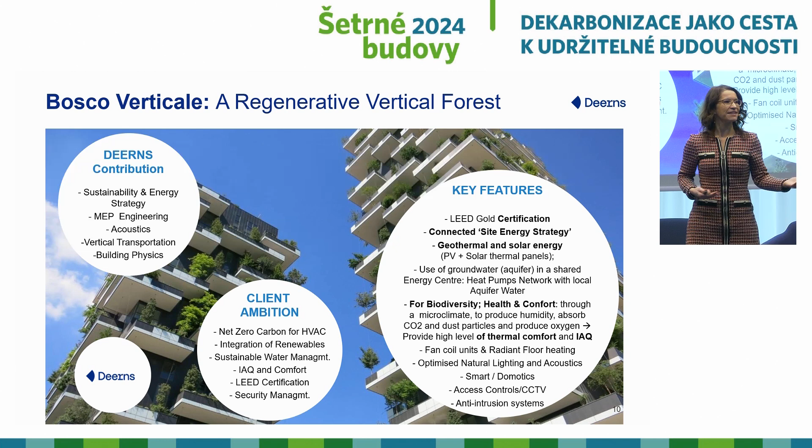Deerns was in charge of the sustainability and energy strategy, MEP engineering, mechanical, electrical, plumbing, acoustics, vertical transportation, and the building physics of the building. One of the key features was LEED certification, but today I'll focus on the energy strategy, relying on geothermal and solar, and how this benefited biodiversity and the trees that you see in the facade.

I won't drown you with a lot of technical information, but just to give an idea, the buildings don't work alone. They are connected within the urban district to other buildings, another office building, a mid-rise office building, and two other low-rise residential buildings. So this is the two towers, Bosco Verticale.

When starting to develop these, we didn't do a system per building. There was already a connected approach, thinking at an urban scale, even for one building. So it was decided to think of synergies, to have different buildings with different uses connect to each other and have a centralized energy center that could benefit from the resources of some and reuse them. Resource reuse, already by then, with heat.

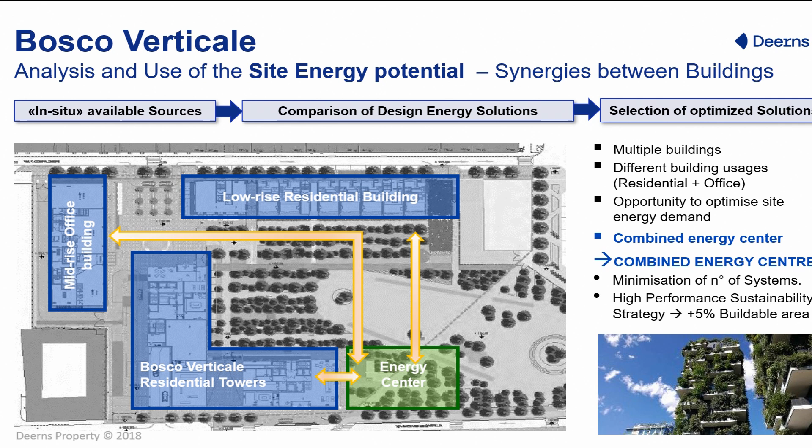So there is this combined energy center that allowed minimizing the number of systems, less carbon, less cost. But also, by optimizing the sustainability piece, you create value, because when you had in Italy, in Milan, a certain level of sustainability, you could have an extra allowance of 5% more buildable area. So you create a business case there too.

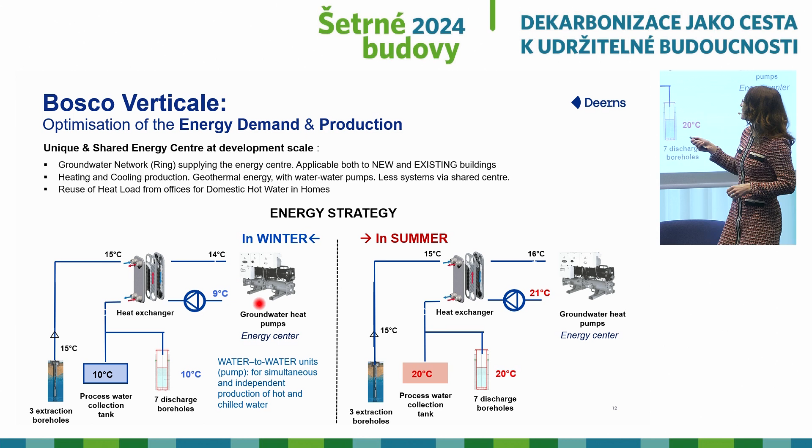Without diving into the details, this makes use of a groundwater system, an aquifer, that supplies the energy center. You get water at 15 degrees, where the temperature is more stable than the air outside. You use it to cool down or heat the building, because the water is hotter than the air outside. Then it goes back through the heat exchange to a processed water collection tank, which collects it and sends it to the discharge boreholes.

That's in winter, so you can heat the building with this geothermal system. In summer, as the water is colder than the air outside, you cool the building, bring it to the collection tank, it cools down, and then it goes to the discharge holes.

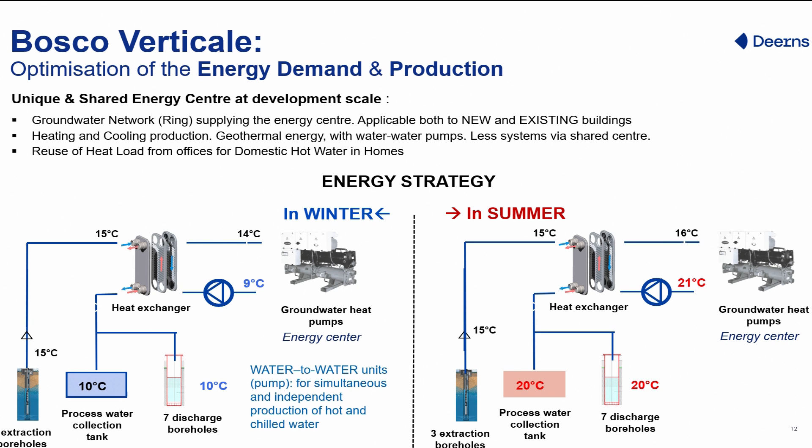The geothermal approach didn't serve only for the energy piece, reducing demand and the energy needed from outside, but also by creating a connection between buildings, a synergy system. The heat from the offices could be reused to heat the water and heat the space, domestic water, and heat the space in Bosco Verticale and the other residential buildings.

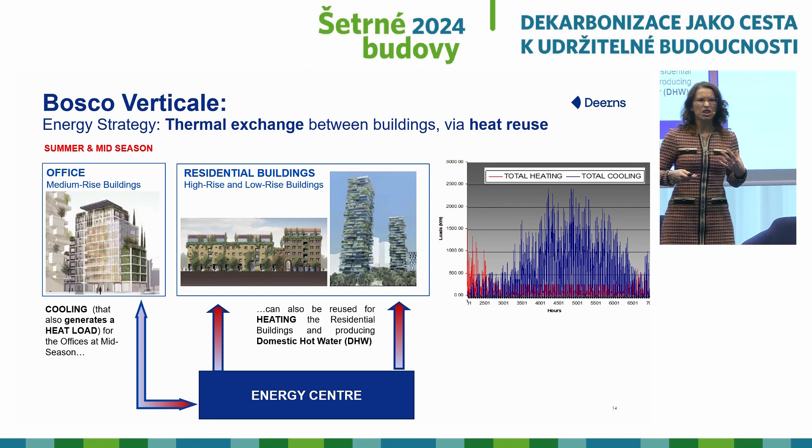This is during winter. The other way around, during summer, when you cool down, the equipment you use to generate the cooling also gets hot. So you recover that heat and send it back also to the residential buildings, from the office to the residential buildings, to keep heating the hot water and for other uses, also reducing the energy needed to do it from scratch. So this is just an example that by 2007, we were already integrating the reasoning of resource use and minimizing demand, thinking of the opportunities on the site.

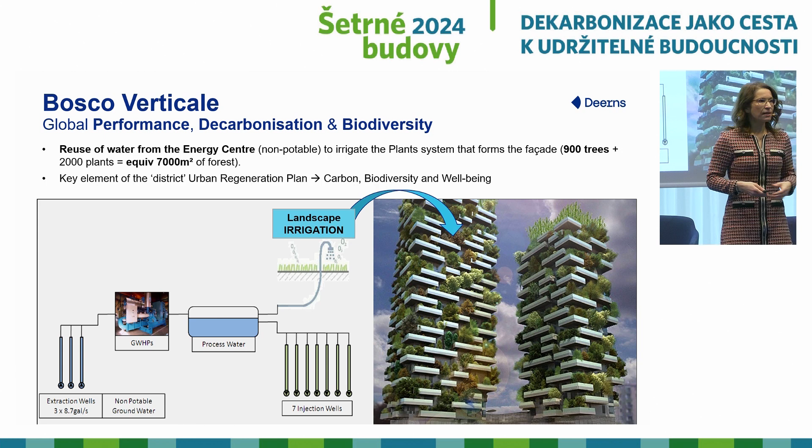It's a building with 900 trees and 2,000 plants that you need to irrigate. So there was also a strategy of water management, because the processed water tanks, non-potable water, were thought to serve the energy center but also to create the water used for irrigation of the building. So actually, it's quite a sustainable approach to use water to keep the trees and the green alive without making use of potable water that can be used for other opportunities.

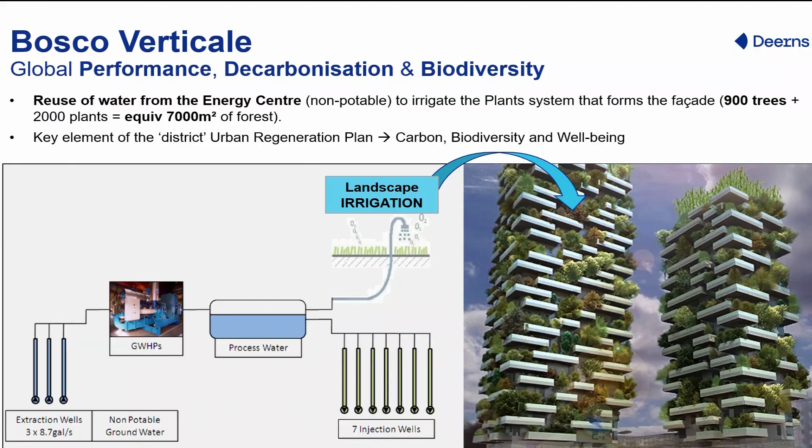So the landscape irrigation was there as a strategy, also connected to the whole energy system, and we had to think of this as a whole system, not just for one topic or one thing, but sustainability as a whole. And here we have Bosco Verticale, thought of at a very early stage, because if you think of this too late, if you think with traditional processes where you design and then put all the systems at the end with the remaining space or budget, it doesn't allow you for much, or at least to become an icon.

So actually this had to be thought since the beginning to explore the potential of the energy sources available on site. And keep this in mind because we'll come back there at the end. The potential available on site and not just imagining that the energy will arrive.

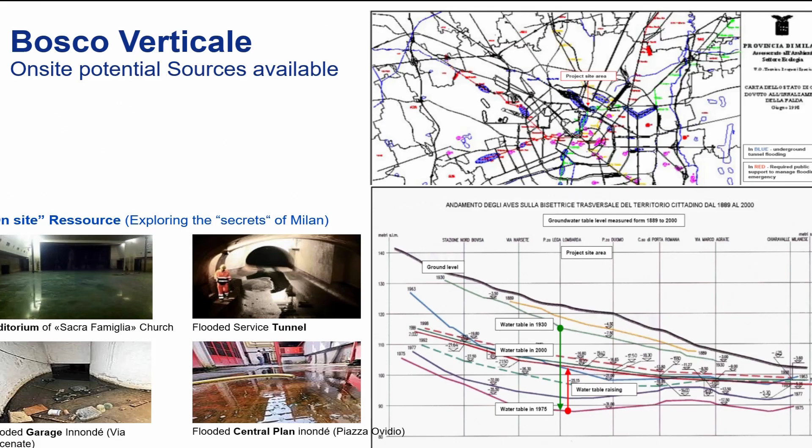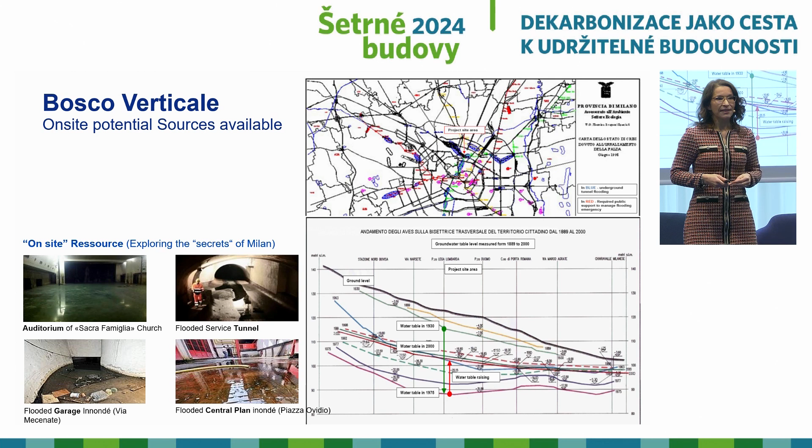So the team had analyzed spaces like an auditorium of an old church, a flooded service tunnel nearby, a flooded garage also there, a flooded central plant, and what could be used to store that central energy center that could serve multiple buildings and make the exchange. So analyses were done very early in the process, in the stage.

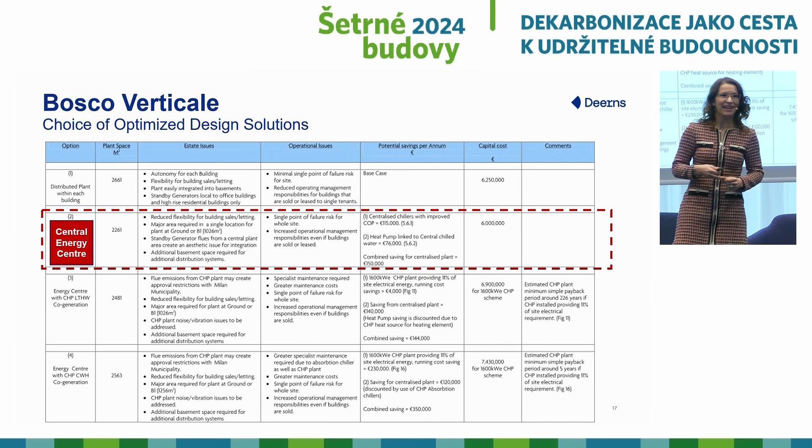The implications of such possible solutions were analyzed in terms of cost, in terms of technical consequences, in order to be able to make an optimized design solution and caring for the performance outcome, but also of the cost and the value generated at the end. So I won't dive in the very small Excel sheet that you see there, but just to give you an example of what's behind all the trees in the facade and the strategy that was thought very early in the process.

Another building from Deerns, The Edge, headquarters of Deloitte in Amsterdam. And here we shift. So the sustainability concept, green certified, evolved also with The Edge to integrate considerations of user experience, smart building, and NZEB, nearly zero energy building. What does The Edge have that's so special?

Well, The Edge hosts Deloitte. It's a 40,000 square meter building, where the request was, we want this to be the most sustainable building worldwide. The request is not to be smart, actually. The request is to be the most sustainable building there. We want to be an icon of sustainability. And actually, during the process of doing it very sustainable and thinking how to make it smartly operational, it became also a smart building icon. Deerns was in charge of sustainability and energy strategy, as well as the MEP and all the systems design.

The Edge produces more energy than it uses. And actually, one innovative point was the use functionality, the intensity of use, because it was required to make a 40,000 square meter building able to host the equivalent of people that would go in 100,000 square meters, because they want to centralize all the people there and intensify the use. So the smart building strategy came also to intensify the use, and they allow for functionalities that would make the office quite tailored to the number of users and type of use they would like to have.

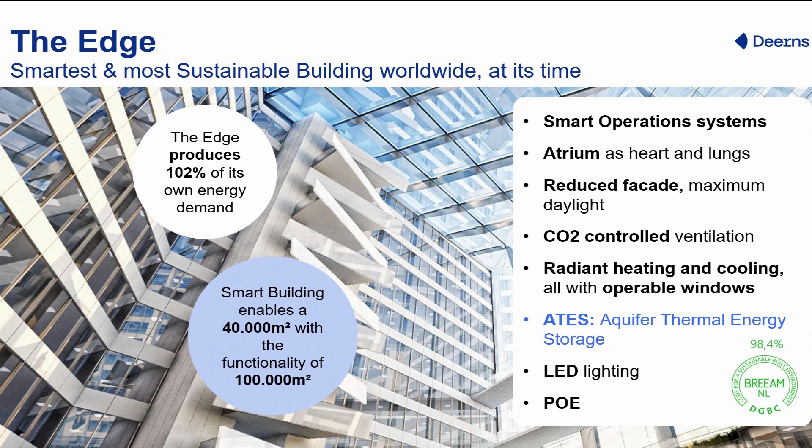So there are different strategies in terms of sustainability, the atrium that works like a lung, that also raises issues. It works very well in the Netherlands, but in other countries it will raise issues of fire security or not, so also the teams have to work on that.

Reduced facade, maximum daylight, controlled CO2, indoor air quality considerations, and one of the elements that differentiates it, the ATES, aquifer thermal energy storage, a solution we use a lot within Deerns for hospitals, data centers, labs, and here for offices, and that we've applied in dozens of buildings. But once again, an innovation in one country or in a segment may actually not be an innovation in another market, and the other way around. What's ATES?

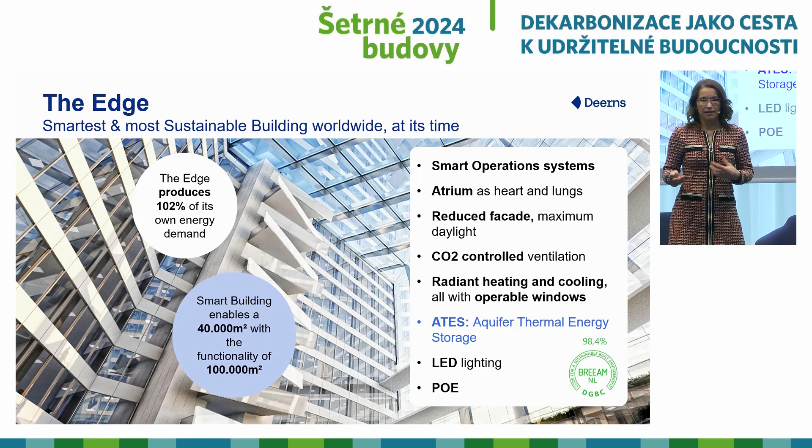Aquifer thermal energy storage. It's also a form of geothermal energy, not the one you see with the water that floods on the ground. Actually, you create the battery in the ground. You'll have a pool where you'll always put the heat in there, and you have another one where you'll always put or get the cold from there. And it doesn't circulate. So you create the battery that becomes operational and actually serves to feed the building with heat and with cold.

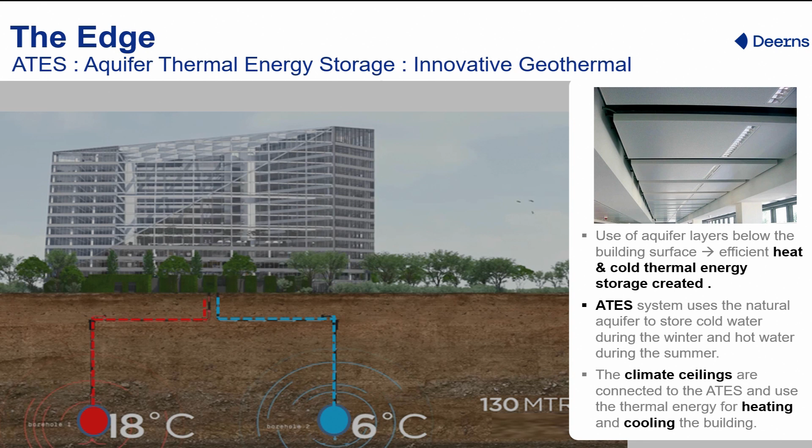Then it's connected to climate ceilings, but here it was just to know that, once again, we use the potential of the site, of the soil, to think how we could minimize, of course, through the building design, the demand, but actually use alternative energy resources with what we have on site.

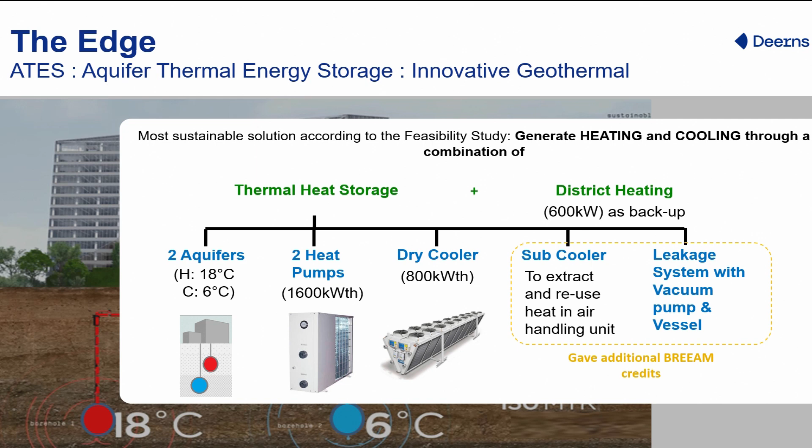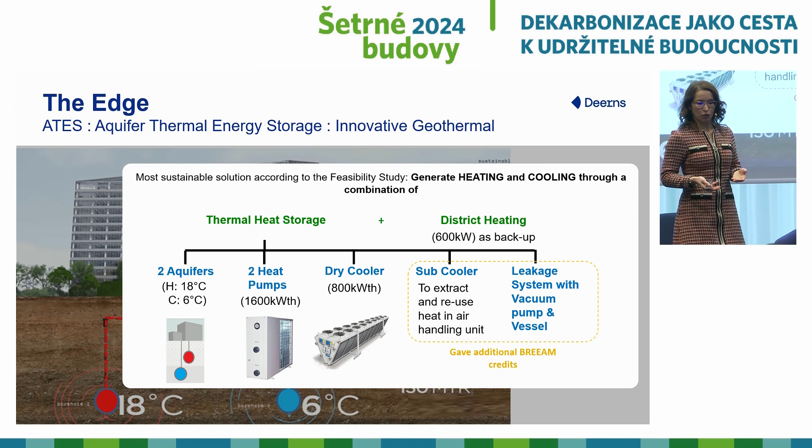It's important to think very early in the stage because The Edge was the building that reached the highest score on BREEAM, BREEAM Outstanding. The earlier you think it, the better you can bring in and play with the credits and get the highest score. If you do it at the end, you have less possibility to actually achieve certain ratings. So also the team worked to achieve the sustainability piece, but also see broadly how by making one or another choice, you could get extra BREEAM credits that allowed actually the building to achieve the rating it got.

One of the differentiating aspects, but for us also as engineering for Deerns, that's where we started. We're an engineering firm, MEP, and sustainability. That's where we started our smart building journey, integrating it actually in our designs. Because the Edge linked sustainability and building intelligence. So it went to other topics.

Of course, we had bioclimatic design. We have solar energy for the electricity production for the different uses. We use also production done in the neighbor buildings, so also these synergies between buildings, and explore the potential with the new legal and contractual considerations. Geothermal, the system I told you about for heating and cooling.

And the smart functionality. Actually, the building works like a phone. I would show my phone, but I broke it.

But actually, you see the phone, you have an intelligence inside, your building operating system or Android, and actually can put the apps you want to adapt it to your user. The goal is to have a building that works like a phone and can put the apps or functionalities inside without having to change the phone, but being able to tailor it for your user. So that was the goal.

But it was not just a gadget. It was not just making, oh, it's a super high-tech building. No, the goal was actually to optimize the resource consumption, to allow for functionality for use intensity, and also to monitor exactly what happens in the building. What spaces are being used, what's the energy consumption, what do the tenants want, and how can I come with new services and therefore new business models.

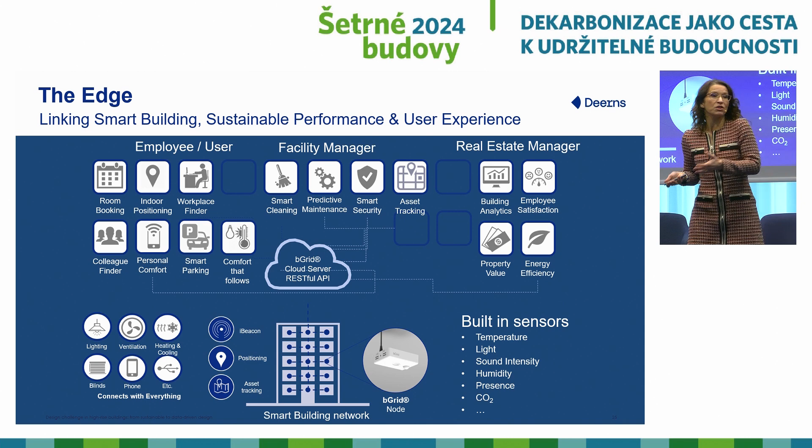We know how many of you today are being asked to decarbonize, to send your performance results, but how are you challenged to get the data? Well, this was thought to optimize the building, make it sustainable, but getting ready to talk and getting ready to report. So it was also a shift point for us in terms of engineering. Here is the example. There are many other solutions inside, but I'll be focusing on this differentiating point.

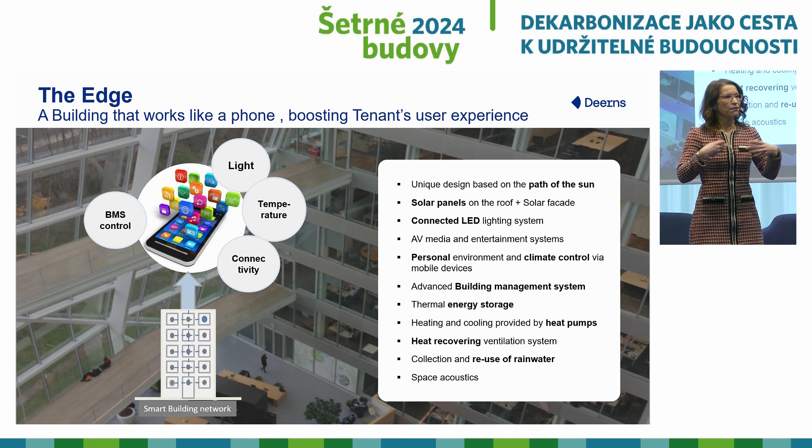The building was thought to be like a mobile, where you can make it progress, you can evolve in terms of functionality without having to change the building and the systems inside every time a tenant would change. And of course, once you have systems that work for something, if you think it along very early in the process, you can connect other elements. And that's where we started working with the client to understand their expectations, the experience they want to have inside, and how they can have systems that allow for this experience within the building.

In this one, we integrated everything before, but also the aspects of health and well-being, and zero carbon, because zero energy is different from zero carbon. Zero carbon consideration since the early stage. In this case, the client: this is a student residence, a house with 142 rooms in Paris.

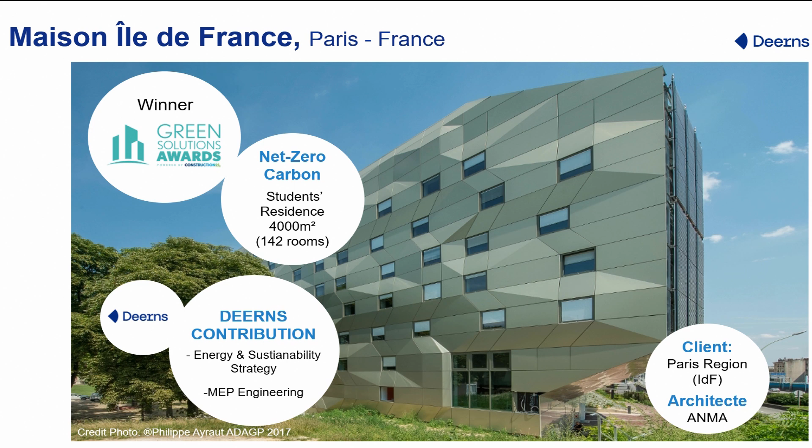This building was designed when the RT 2005, the thermal regulation in France 2005, was in place, so those were the levels we had to comply with. It respects today the future regulation of positive energy buildings. We did the tender in 2010. It finished in 2017, so just to say how we anticipate, because given the process and how regulation is evolving now, if you don't want to be obsolete at delivery, think ahead of what your regulation requires today.

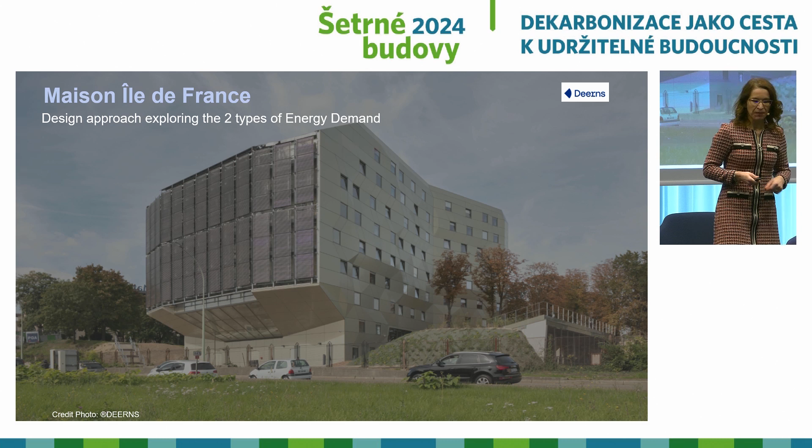So what's the principle of this building? Well, first innovation, the work with the architect. It was a collaborative work since the beginning. The architect said, how do you see an energy strategy here? What's the sustainability? We'll design the building based on that, and we worked hand in hand since the beginning. So already there is an innovation because it's not the usual practice of the market. And it is key because what we need to deliver is not pieces of building, it's a global performance. So each of us has a responsibility, and whatever we deliver will also impact the delivery of the others. So it was really a collaboration.

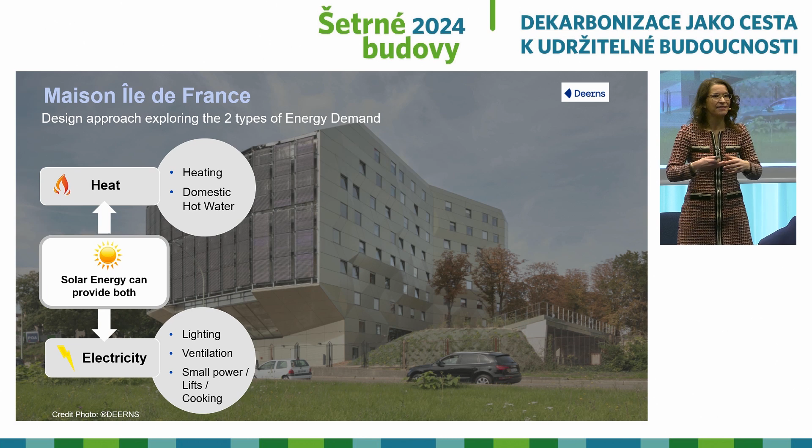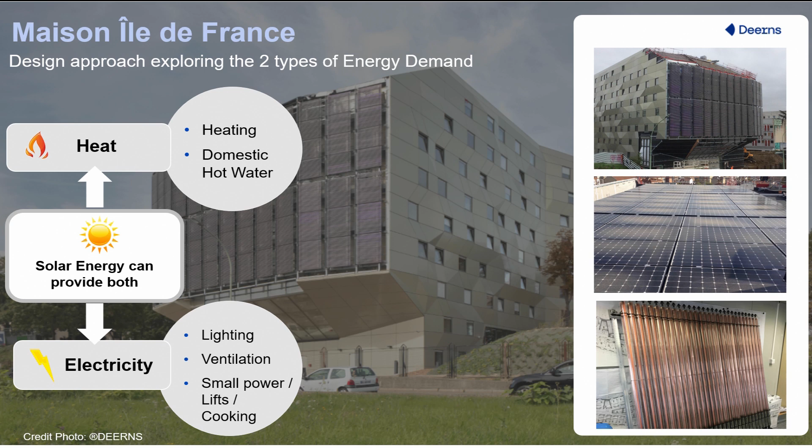And how does the building work? Well, it needs heating for the building and domestic hot water, and it needs electricity for lighting, ventilation, small power, cooking and other uses. And actually, the sun can provide energy for both these elements. How? The team had an idea that we saw in Germany and Switzerland for little houses, but here we put it in a big house. The idea was to take a tank full of water, heat it with the sun, use the water's inertia along the year, and also produce on the roof the electricity needed. Simple.

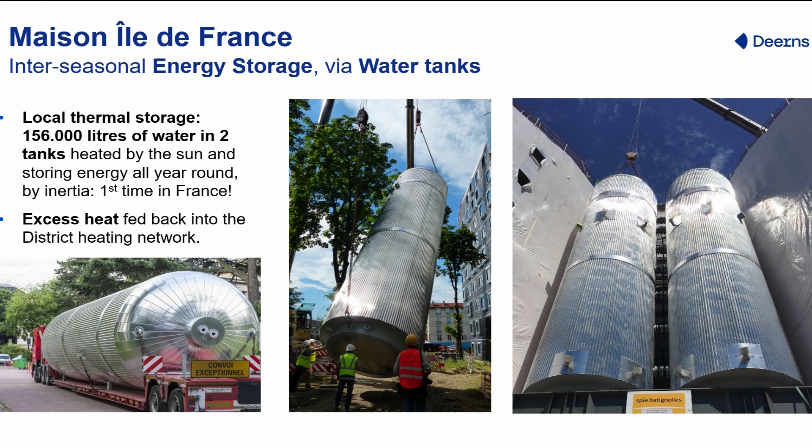It's a tank of 15 meters, full of 150,000 liters of water. It was a first in France, because this kind of tank is usually used in industrial buildings, horizontal and underground. And here, we're using it vertical, for residential and in the facade. And we thought about how to integrate this with the district heating network, in case there was a problem in the future, also thinking of resilience.

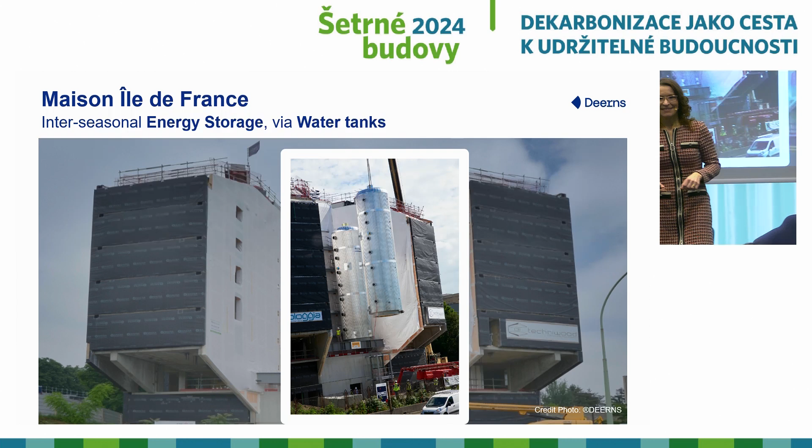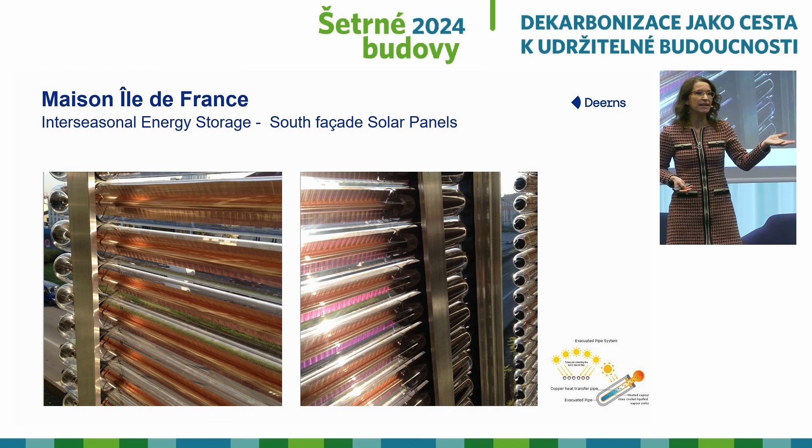So here's the building. The southern facade faces a highway, so it was not that comfortable or pretty to see from the room. So we used the south facade for energy production. Here's the building, and in the middle, two tanks of water. And in front of the tanks, solar panels that heat the water in the tanks. The tanks, as they are very high, higher than me, but that's not hard, vary in temperature from 50 to 90 degrees. So we can pick up the water at the temperature we want, either for heating or hot water, in a closed loop. We don't use that water; it heats the water that is used.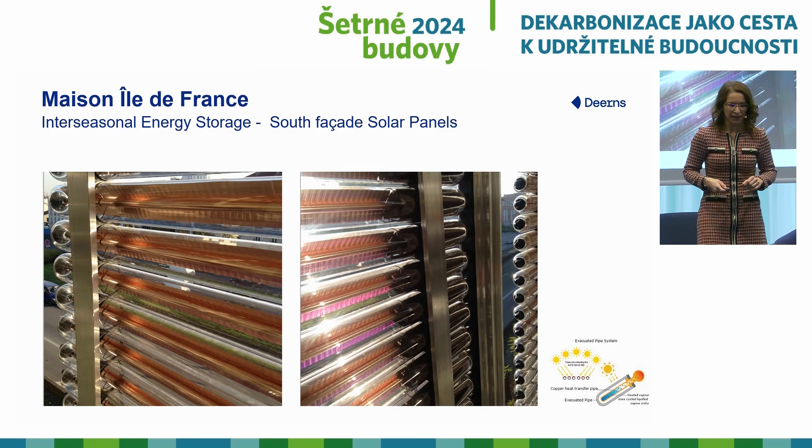It's also technical challenges, because we had to stop the highway just to put the tanks in that day. With innovative systems, know what solutions are out there, make the good mix to integrate and have this performance at the end. Well, I'm going the other way around.

It's not just putting in solutions, it's designing the building to minimize its energy need. We needed to understand clearly the users' behavior, how the student residents behave, minimize the use of water and energy, and reuse resources, heat recovery for the showers and the ventilation network, so that we recover everything that is lost, need less energy, and can stick to the promises. And it's a building that produces the whole energy it needs. It's without cooling, it's not cooled. Here it is. By minimizing the energy demand first. This is the room.

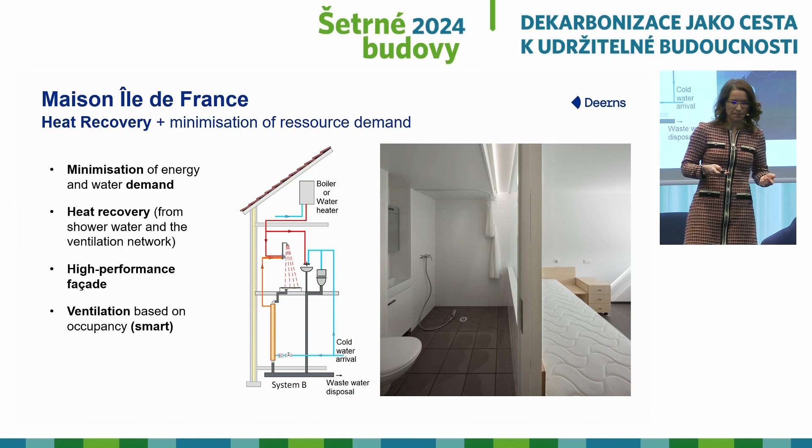The bathroom is just behind with glass like that. The light passes by. During the day, we don't need to switch on the light most of the times, as you see in here. And so it's little things, but it will build the whole strategy of the building.

And also think about automation by that. Well, it's students, they will stream, they will party, they are not very aware of sustainability. So how can we control their behavior or help them in their behavior so that the building doesn't end up consuming a lot outside of our scenario.

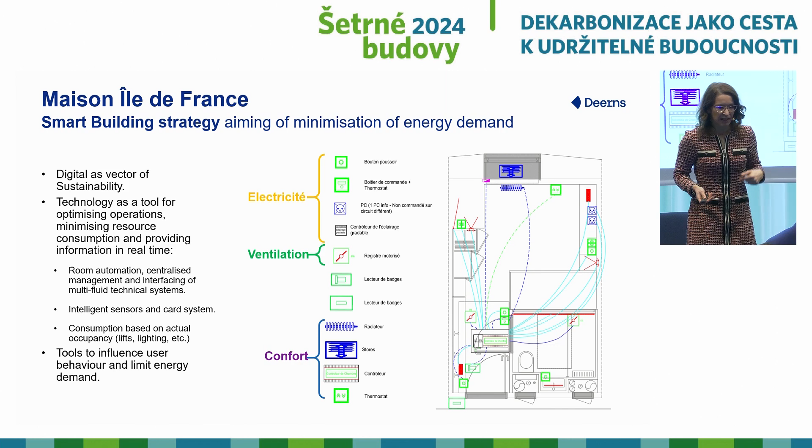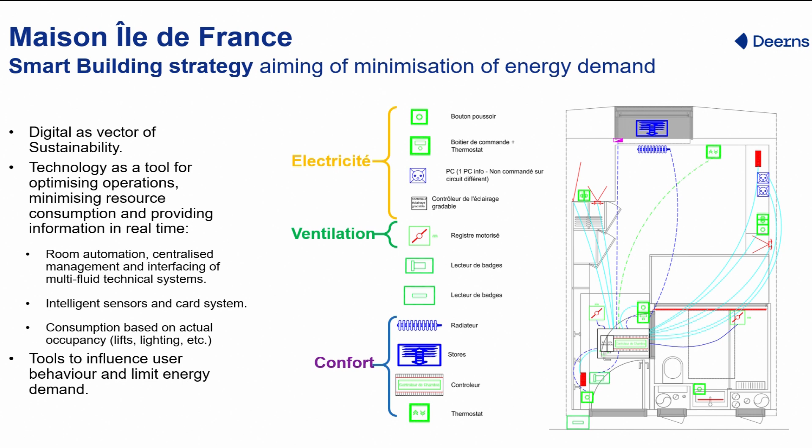So actually, even the technology or the tools that were put inside were thought to make an intelligent way of functioning, connected way of functioning, so that the rooms work like a hotel and on real-time occupation, so that we always keep in mind that it's not just delivering a building that is sustainable in its fabric, it's also delivering a building that will be sustainably used and where the users know how to use it and help controlling a little bit the behaviors when they don't know.

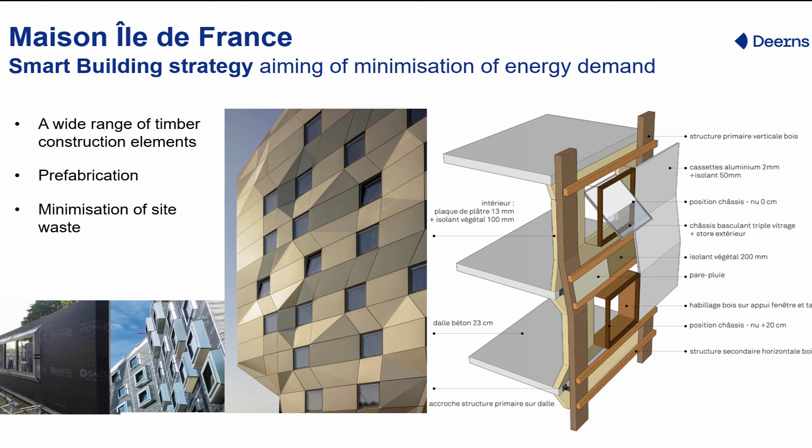So also by then, and part of the presentation we saw today, Maison Île de France had a wide range of timber construction elements. We're thinking of the prefabrication, calculated the whole life carbon, minimizing the site waste, topics that you see today, and that were already being considered by then because we needed a whole life carbon approach and wanted to touch different topics.

And always think not just one system or another, but the global performance approach and how the building can work fully in terms of global performance at the end. So always put together the different solutions that give an idea, and these require complex studies.

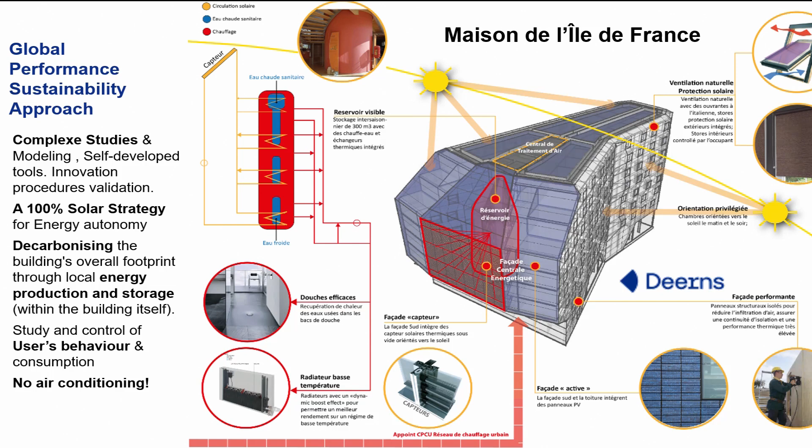And another thing of innovating, it's a building without cooling. Not every client would accept to have a building without cooling. But actually, if you don't have cooling, you have less energy demand. But it requires making a bioclimatic design that works.

So it was for us a project that worked in the energy and ecological transition, human experience. We engage the users, we engage the client. The building has a system of sound that makes a little uncomfortable sound if it's consuming more than it produces, helping the user. Digital transition, also think of the systems to talk to each other and serve the purpose of sustainability and resource efficiency, and process revolution.

And if I mention the process, it's because these projects are not easy, they become history, but they're not easy, because with this kind of modeling of innovation, first you need to declare innovation, you need to get insurance, you need to model with tools that are not in the thermal regulation of the country. So actually, it requires daring to innovate.

Clients that dare. We all like to hear of innovation, but how many of you would like to be the first to try one of these systems? Especially when we're tendering with normal procedures. Well, we need people that dare in our teams, in their teams, and explain a lot. Yeah, is it going to work? Yes. Is it going to work? Yes. It's going to work.

So, persuasion and education, we heard today, education is a big part of the change. So we need to train our teams, we need to train the others, we need to learn, we need to push the know-how boundaries, because an innovative project is called innovation because we're doing something that is not the usual, the business as usual. Train, consult, and share.

It's not, oh, that's the competitor, don't share. No, we need to talk to each other and to learn. Otherwise, we won't accelerate the process. We'll always work in silos.

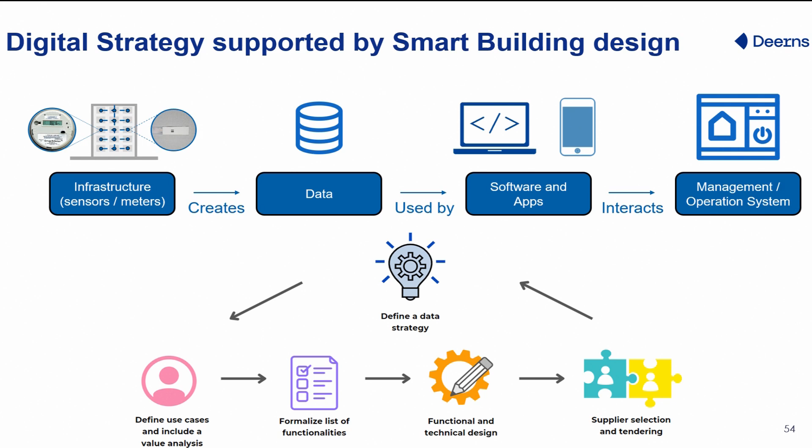So the goal is actually to think of the minimum infrastructure that will provide you the maximum of functionality, resilience, and flexibility. And we see that because we're an engineering firm. Currently, we're designing the digital strategy of buildings, of portfolios, and thinking of the infrastructure all buildings should have for a specific client so he can get the data at the end of what is happening in all these buildings, to facilitate reporting.

It's happening, and actually you should see it from the other way around. The Edge became an icon. It became a brand, and actually it became a business. The Edge, hashtag that you know, actually uses this smart infrastructure and the data to provide full data-driven service packages to its clients.

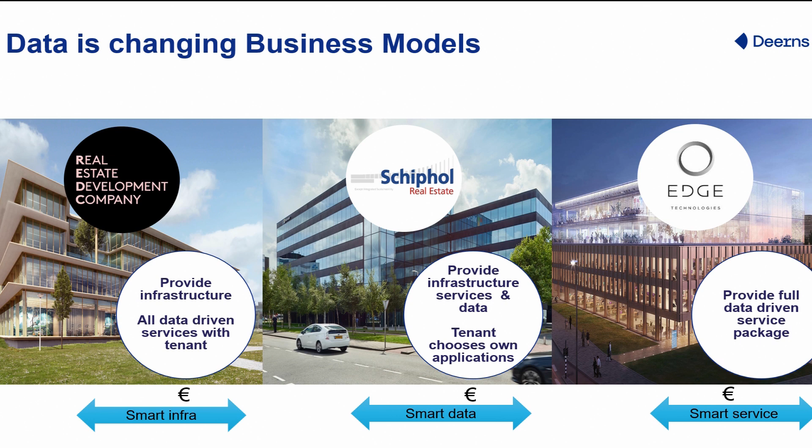Schiphol Real Estate, Amsterdam Airport, uses the same technology and has another business model, which is smart data instead of smart service, providing infrastructure services and data, and then the tenant chooses its own applications. REDC, same technology, another business model, where they provide infrastructure and data-driven service activated when the tenant is in. So actually, it's how we use data, how we use the infrastructure, to also influence where you position in the market, how you create value.

Yeah, it comes from engineering that you usually put at the end of the process. So we have here infrastructure, creates data, used by software, management, operation systems.

Where we see today is that we're designing smart buildings, creating strategies at the beginning of the process to connect the data dots, you need it for reporting, to generate value, help your business, and ensure digital transition and resource optimization use. It's how the infrastructure you have will help you generate the KPIs you need in terms of health and well-being, sustainability, optimized operations, service and user experience, and many others. And how that comes from the infrastructure you put inside.

And I tell you this is happening for one building, and we're working with clients that are implementing this on their portfolio all over Europe, with blueprints, same technology, same infrastructure, the building varies. But that's the purpose behind it.

And one other aspect, and then we won't go much further: off-grid and regenerative. Does anybody know, except those I talked to before, what this is? No? This is the Netherlands.

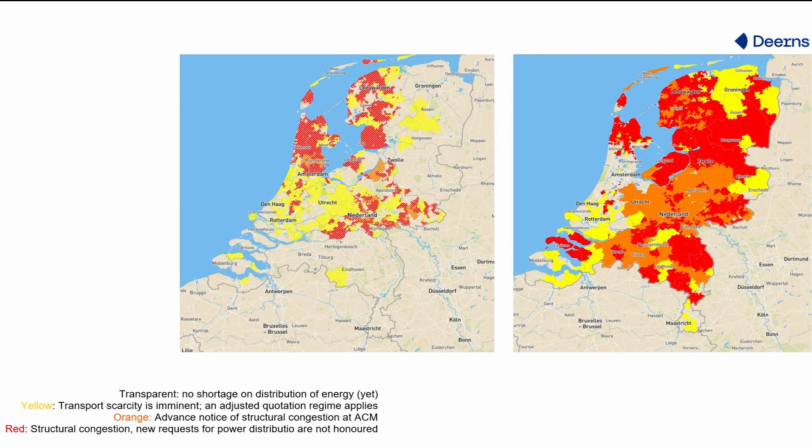Yeah, until there some of you had arrived. But what is red? Red is the regions of the Netherlands where you develop a building and don't get energy before 5 to 10 years. It's quite red, the scenario. So all of you that made a decarbonization plan of your assets, thinking that actually energy is there and renewable will come, well, actually it's not there.

Because actually we are facing a congestion of the power grid. This is the Netherlands, it's today, and I was already talking about this 2 years ago. Because the pace of decarbonization being demanded by the buildings is faster than the pace of evolution of the infrastructure of the cities to generate energy. Have you thought about it? Actually, we have projects where they say, okay, go ahead, technically it's okay, but we'll wait 5 to 10 years, tell it to your clients, to get energy.

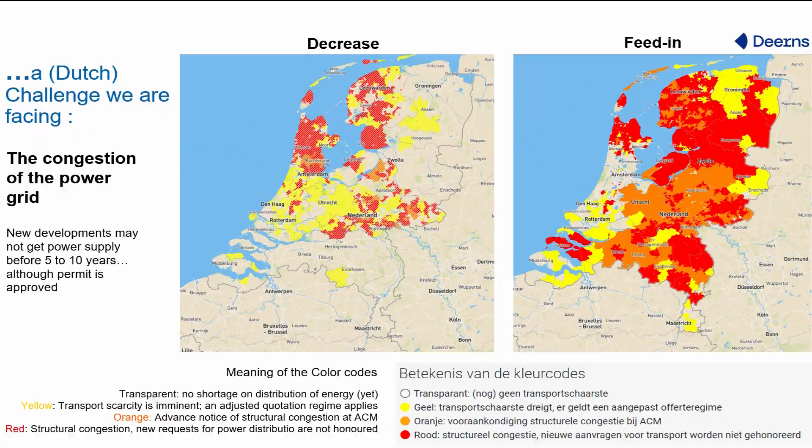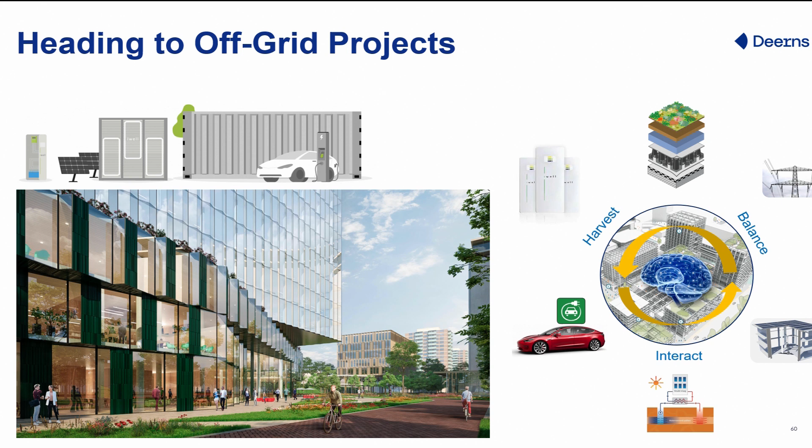So actually, designing buildings today that are going to this off-grid, regenerative approach, you need to think how it will generate, store, and use the energy locally without counting on what's around. Because actually the grid is saturated. It means you don't get energy, but even if you produce, you don't put the energy in. Different problems.

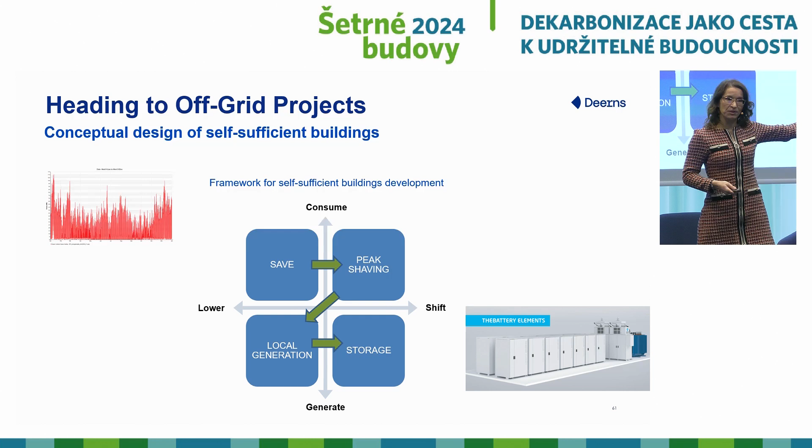Conceptual design, self-sufficient buildings, that's where we stand today, thinking on the solutions, on the possibilities with our clients, how you can save, manage peak shaving, local generation, and storage of energy. And to store, you need a battery, or the soil, or other solutions. Remember energy storage, energy generation that we started telling in the beginning of the presentation? It's topics that are updated, solutions are there, just that the context was different, and the dynamic too, and the willingness, or the limitations by then.

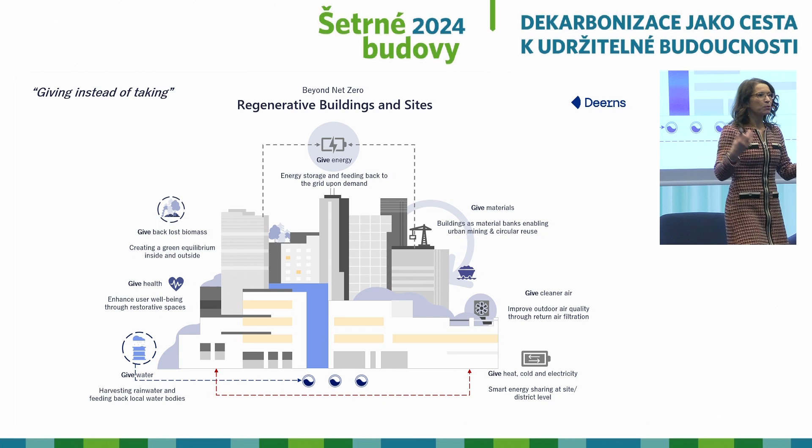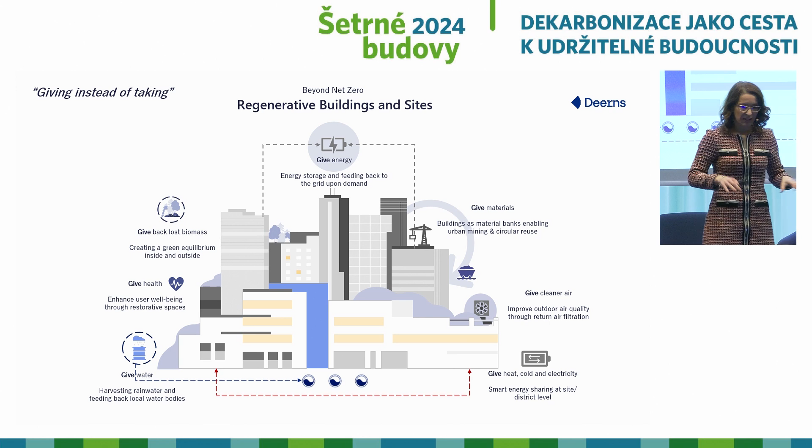Regenerative buildings and sites. It's actually pushing the thinking beyond. It's not just have regulation and I'll reduce, or I do net zero. It's going positive. How do I impact positively? How do I make it better than it was before? Be it for the water, energy, how actually I can generate, use and contribute for other buildings, because you know, not every building will be able to be net zero. So you need to find solutions. You need to collaborate, find new business models.

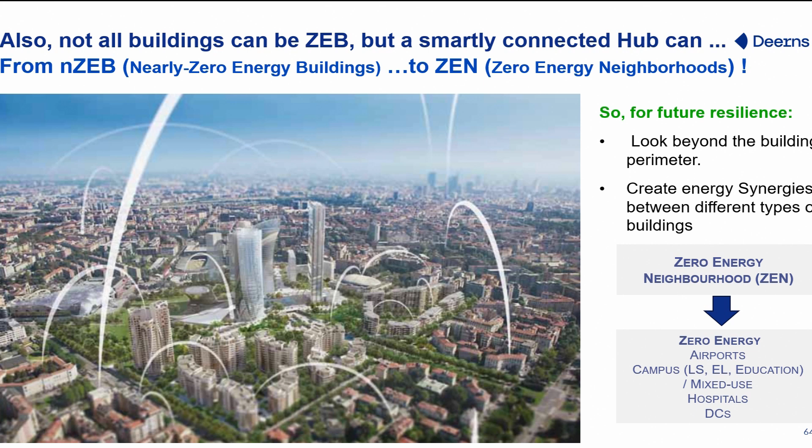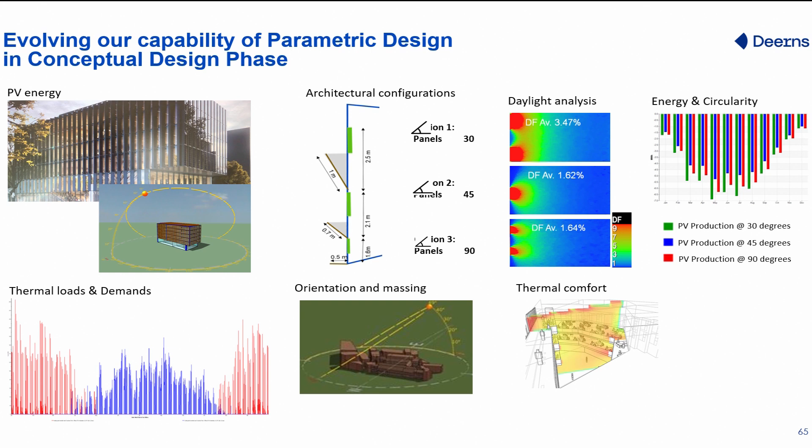We need authorities to also bring new ideas to make it much more agile and create synergies between different types of buildings, and that requires doing differently. Connecting different market segments, airports, data centers, labs, residential that were mentioned in the beginning. So it's not just collaborating internally with our teams, it's all the market and all the value chain. And even ourselves, we're evolving, having this parametric design. It's no longer deliver an expertise. It's defining parameters and at the end make the global performance integrate those parameters we define.

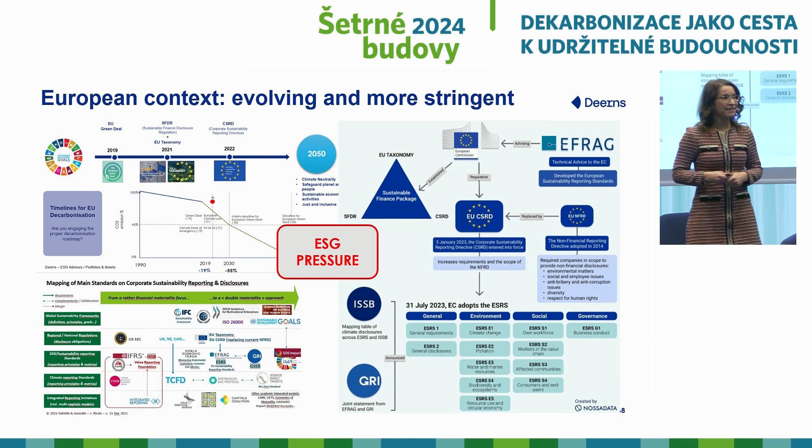So what's next? This keeps evolving. If you're waiting for it to stop, it won't. So you have ESG pressure. We heard it in the beginning. And the game is changing. Regulation is there to be adopted. And it can be quite a mess for those who are only diving into this now, but actually things are connected. So there is pressure, but not just from regulation. It comes also from the market, from institutionals, from the users and the tenants that have new demands, new requirements when they want to select a site.

So when we talk about ESG to my clients, I see different types of reactions. Some panic. We're all gonna lose money. So panic emerges for some. For others, ESG can be an opportunity, a risk, let's see, let's test, I'm in doubt. And the others understood that it actually can be really a great opportunity and you better do it before others. Because if some say ESG creates value, for others, and the market is tense in Europe, ESG will actually be a way of depreciating less than others in a context that will be tough still for a while.

So ESG is becoming a license to play. It's not a trend. If you won't be ESG compliant, your asset probably won't be able to play or to operate as you planned initially. That's not me saying. That's the latest reports of ULI. And when you look at that report, what are the rising concerns from real estate players? 9 out of 10 think that running an environmentally and socially sustainable business is the most important factor for a successful organizational transformation within the real estate industry by 2025. 9 out of 10. Are you the 1 out of 10 or the 9 out of 10?

And in those topics, the ones rising in awareness from one year to another: environmental sustainability, decarbonization requirements, increased regulation, national and international. Don't think Czech, huh? Think Europe, because investors are there, are coming too. And some of you have assets outside. Asset obsolescence. You don't comply, it's obsolete, you don't operate. Lose money, lose value. So if you're panicking, it's not over.

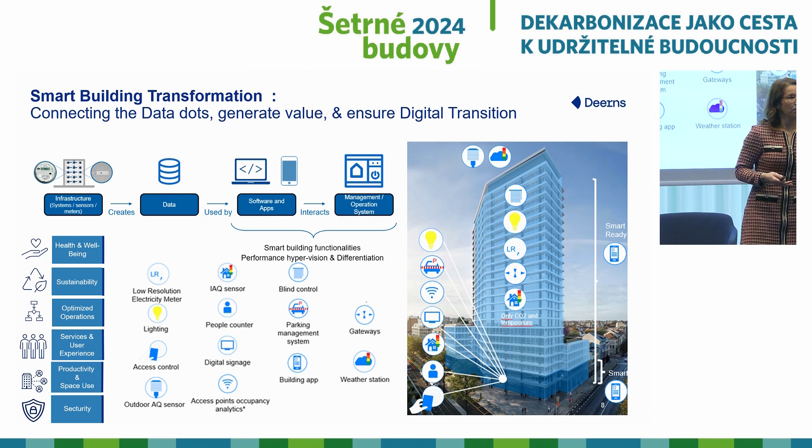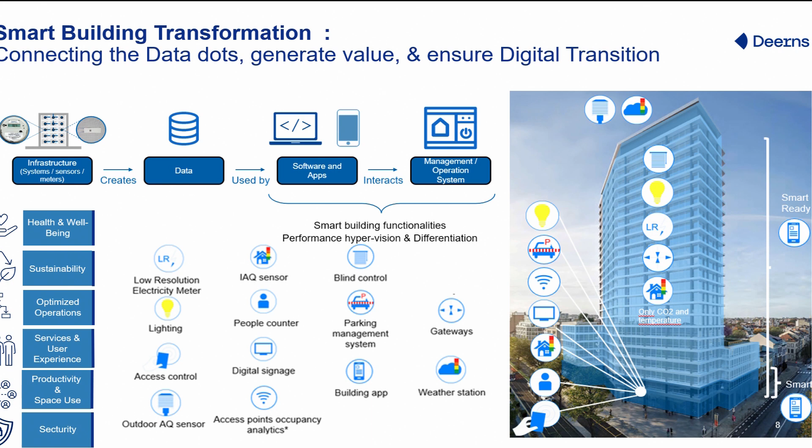I am positive, because when I see how engineering has been evolving, infrastructure is not just systems that we put at the end. We think it ahead, and we think it for multiple purposes. We're thinking it not just for one asset, but for portfolios. Investors and developers are calling engineering at early stage and corporate level, not just at the end. And that's change.

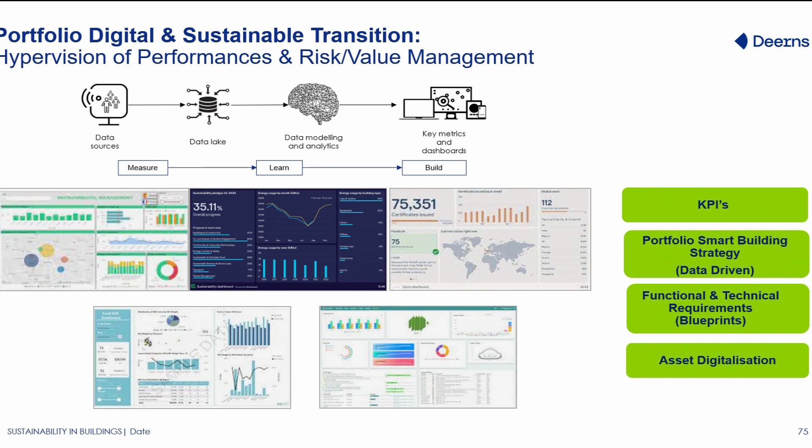I'm positive because it's about performance. It's about understanding the power of data and the fact that sustainable buildings can go much beyond some topics. It's about data sources, data lakes, data monitoring, dashboards, analytics, and actually being able to decide better. We're being asked to analyze also these aspects at the portfolio level, to decarbonize, establish guidelines and blueprints, to be sure to have ESG-compliant assets that also serve a business purpose.

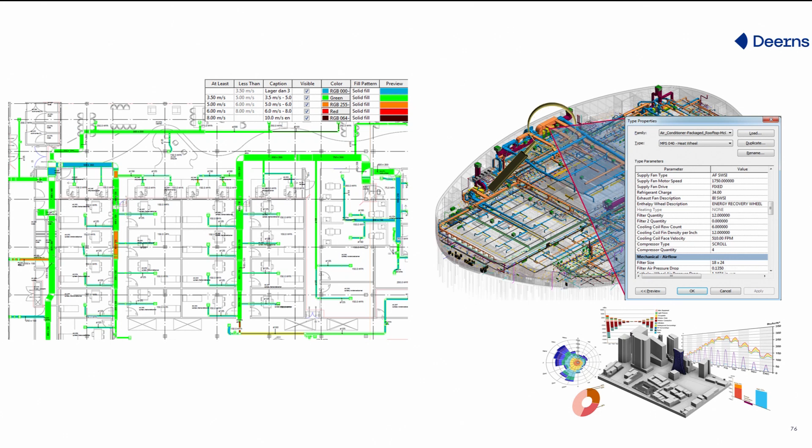I'm positive because where we used to do engineering with kind of boring drawings, we're actually doing dynamic models, BIM information that prepares the information of the whole building, and data is money. Because you prefer to buy a product with no information, or a product that is quite well detailed in its features, you know, to count. In Madrid, in our Congress, one of the investors said: I prefer today to buy an asset that is very low performing but has a full set of information that allows me to understand where it goes, than a theoretically very sustainable building that I know nothing about. So yeah, information has value. And engineering is being called to understand how the building performs and its potential.

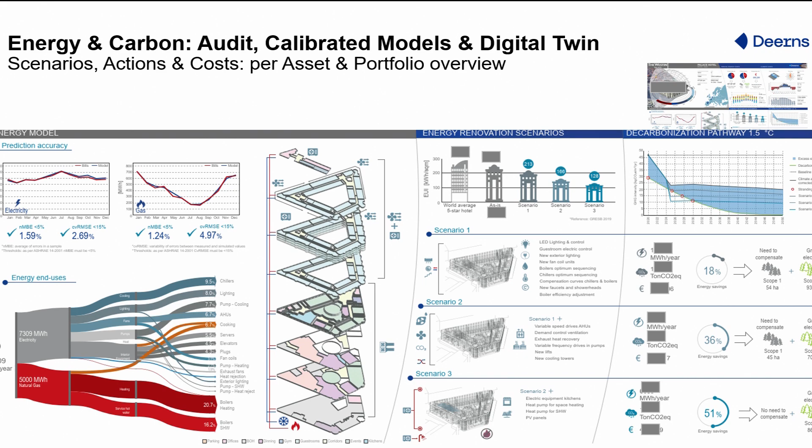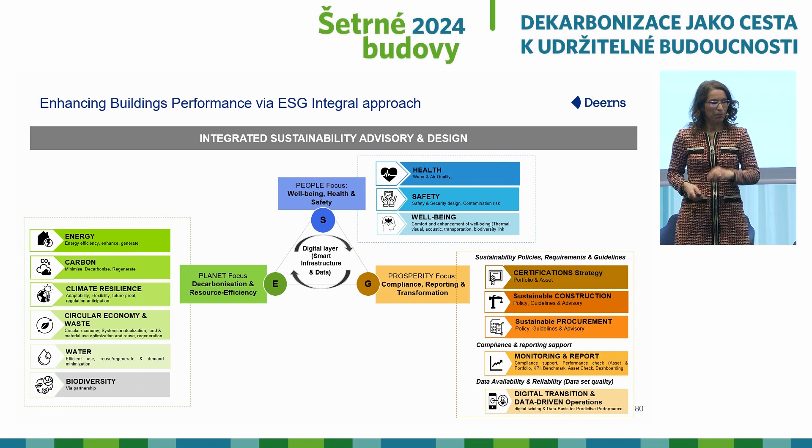I'm optimistic because from the beginning, we see how ESG can be a lot, and it can be small — it depends, but it's up to you to define the scope. The goal is making assets fit for purpose. Engineering is looking at several aspects of ESG: the planet, the people, prosperity, linking the three of them. And actually, from guidelines to energy, carbon, water, and all the topics, we can all act on that.

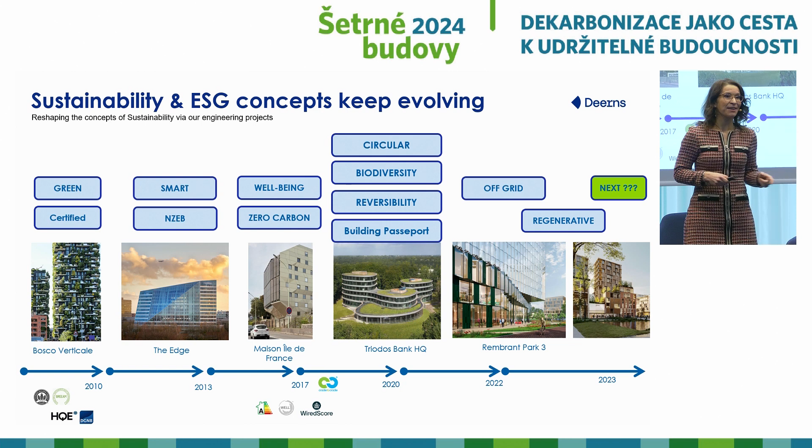So I'm optimistic, and I'd like to see you also on board on these, and actually for the next time I come to Czech, to put the Czech building in there, and to see together what will be next, because this requires a lot of collaboration and it requires to go fast.